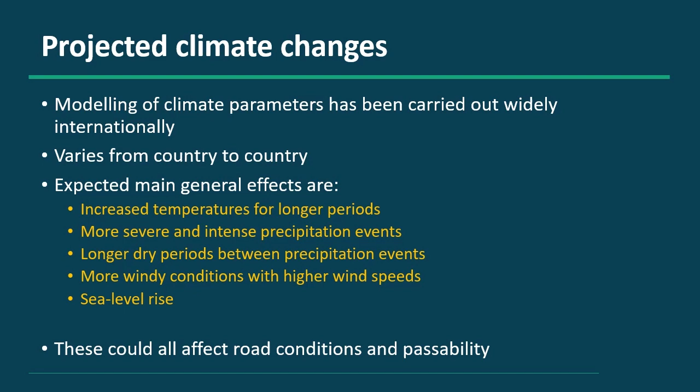What are the climate-related impacts on roads? We'll highlight the potential problems and the impact on the freight industry. The following projected extreme events are of most interest to us here: the more frequent and severe extreme precipitation events and the more prolonged periods of high temperatures and windier conditions. The impacts of the extreme events on roads vary.

Obviously, in the simplest case, we get temporary impassability, excessive wear of the road, and these end up in transport delay costs. We get damage to the road surface, which ends up with higher vehicle operating costs, much slower travel, and more time delays. And then the worst scenario, total collapse of roads or bridges, where we get long delays or use of less desirable alternative routes. And we'll discuss this in a bit more detail shortly.

We can implement adaptation measures. This is done by the road authority before the event, and this will reduce the effects of these problems significantly. But it's costly, and the sort of retrofitting of bridges, for instance, and retro repair of roads is just not going to happen to all the important roads that we'll be looking at.

Okay, if we look at temporary impassability and excessive wear, extreme storm events affect unpaved roads, which are either earth or gravel, but we call them gravel roads generally, far more than paved roads. Obviously, the gravel roads have a natural gravel or earth wearing surface directly exposed to the vehicles and the environment, whereas on paved roads, the pavement structure is protected by either bituminous or concrete surfacing.

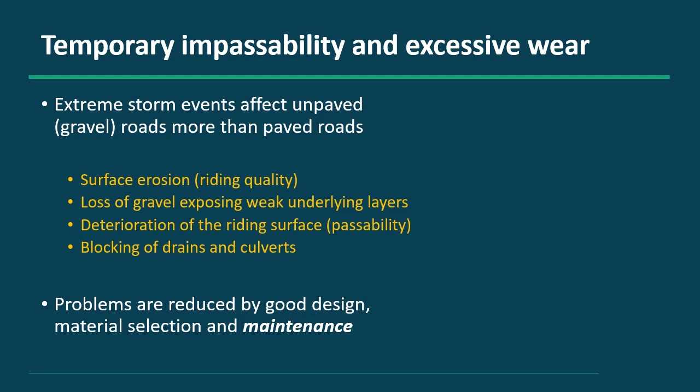We need to get that water away from the road, the pavement structure itself, and lack of maintenance really ends up deteriorating the whole road condition. So problems are generally reduced by good design, good material selection and construction, and then, as you'll hear over and over, good maintenance. If we don't maintain the roads properly, then we have major problems.

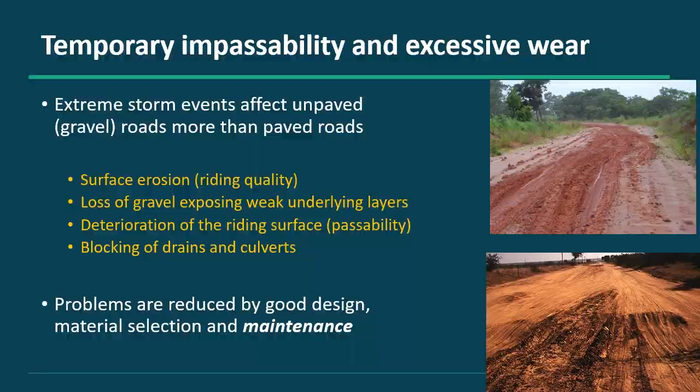Again, just another example of a deteriorated road. The water's ponding there, softening the material, and deep depressions are forming. One can see in the top right photograph, the vehicle's going right up into the edge of the verge, into the vegetation almost, to get around the damaged area. This certainly affects the speed with which you can travel on the road, as well as the condition or roughness of the road.

On the other hand, if you look at the bottom right picture, this is a well-designed, well-constructed, good materials, well-shaped road. This would be resilient to almost any storm. And this is what the ultimate good unpaved road should look like.

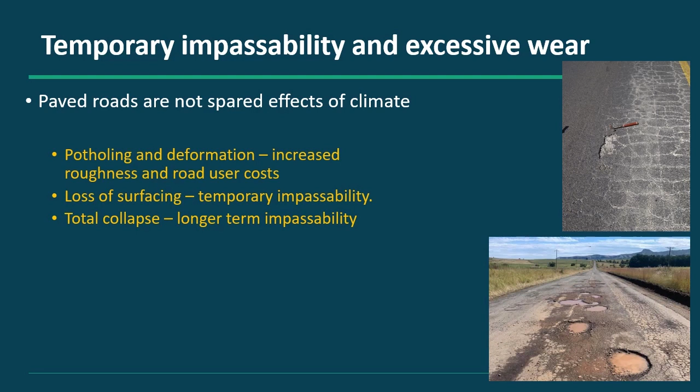So paved roads are not spared from the effects of climate. Potholing, deformation, we see that in paved roads as well, ending up in increased roughness and increased road user costs. Ultimately, the cracking and deformation leads to the loss of surfacing, with potentially temporary impassability or total collapse of the road. Problems can also be reduced by good design, good construction, and good maintenance, but this is a road authority obligation, and there's not much the freight operators can do about this.

We can see again the photographs on the right. Water's got underneath the surfacing, lifted it up, and basically it's just moving away from the road. The even worse situation is shown in the bottom photograph, where water got again into the support structure of the road, and the entire road for many kilometers collapsed, as you can see in this example.

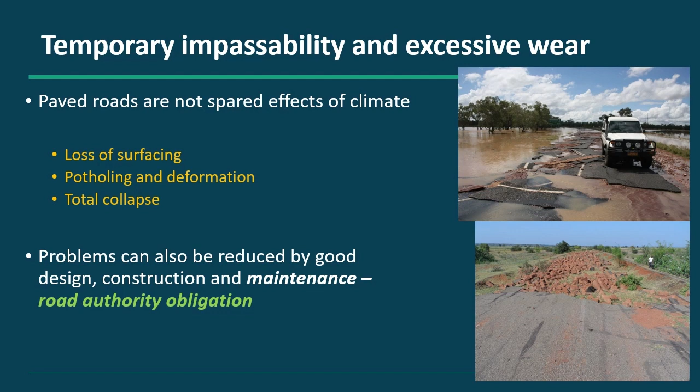So the damage to roads and structures caused by flooding is an important issue that is going to increase in future. It's not always too difficult to repair, maybe 1 or 2 or 3 days to restore passability, but then the road still has to be graded to smooth it out and improve the riding quality. Nothing can be done before the water has receded. So again, there could be delays. The road needs to dry out totally, or the water needs to get away totally, and the road needs to dry out to the extent that one can actually carry out repairs.

The problem with heavy loads on saturated roads is we get premature failure. We get what we call pore water pressures developing in the material under the vehicle tires, and the strength diminishes to almost nothing, and we get shear failures and major distress in these layers. We'll discuss this a little bit later as well.

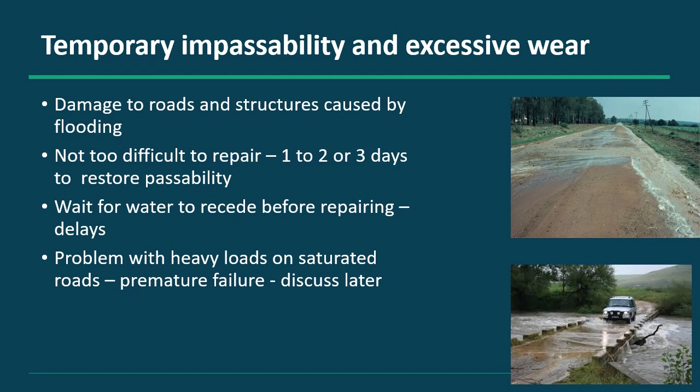Again, a low water crossing, we'll talk about these a little bit later, common in developing areas, which are designed to be flooded, but they can cause major delays. Cars cannot get through usually, and the cars block the road, interfering with passage of heavier vehicles.

Landslides too are also often the cause of road closures. They're usually triggered by high rainfall, and they can close the road from a few hours to many months. You can see the upper picture here, it's a relatively small landslide, covering about half of the road, so it's still passable. The bottom photograph, this is a very large landslide, continuously moving. The road is actually buried under the debris at the bottom of the landslide, and there's an earth road deviation avoiding this landslide. Again, in wet weather, causing major delays.

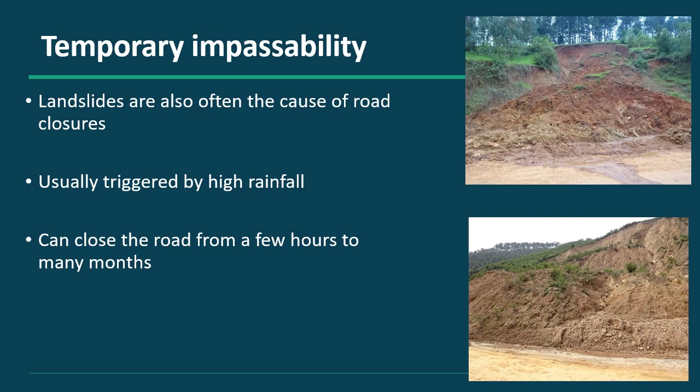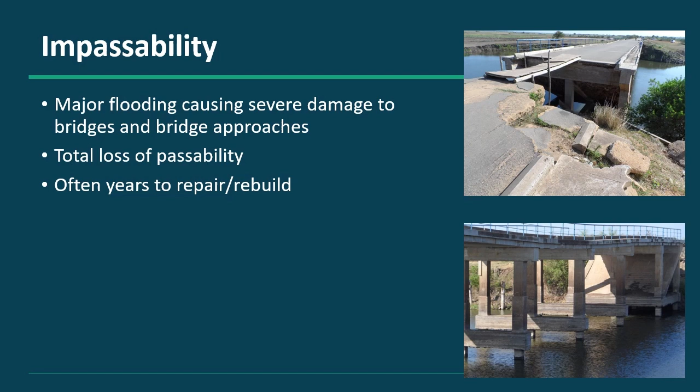This entire bridge had to be demolished and rebuilt solely due to flooding, and the flood waters got up to the bridge deck basically. Often this type of damage can take years to repair or rebuild. In this case, as I said, the entire bridge had to be demolished and rebuilt, and with the contractual and procurement and all the other issues, this took well over 10 years before it was completed.

Okay, we've spoken about precipitation. Now what about high temperatures? We can expect longer periods of hotter weather in future. I think almost every climate model shows that between these severe or more severe extreme precipitation events, there are going to be longer, hotter, drier periods. They're going to affect both unpaved and paved roads.

Unpaved roads, we end up with more dust, more corrugations, the riding quality deteriorates, the safety deteriorates with the dust, the wear and tear on the vehicle components increases, the more dust there is, the driver and passenger comfort deteriorates. So there are a whole lot of extraneous connotations related to these dry periods in developing areas.

Bituminous surfacing and asphalt. Bitumen is what we call a thermoviscoplastic material. So it's hard and brittle when it's cold, and it's soft and ductile or can flow when it's hot. And roads are designed to take these two extremes into account and to operate in the area between the extremes, so they don't deform, but they also don't crack.

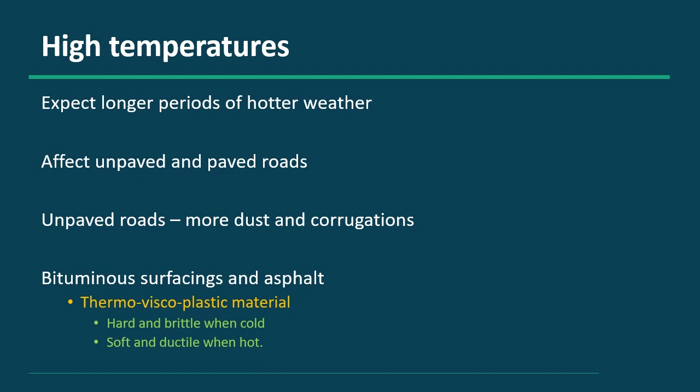It's interesting to see the effects of direct sun and shade. These two photographs are taken just a few meters apart. The photograph on the left shows a pavement structure badly deformed. You can see there's a rut beneath that straight edge of about 30 millimeters. There's cracking, there's movement of material from beneath the surfacing that we call pumping. There's spalling of the cracks, which are slowly developing into potholes.

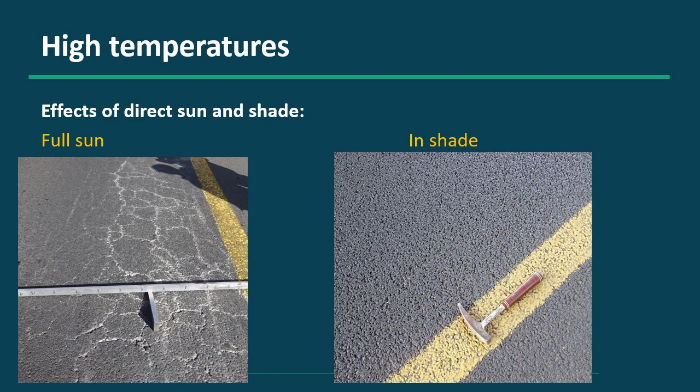Just a few meters away, in the shade of a bridge, that same pavement structure with the same environment, same rainfall and everything else, same traffic, shows absolutely no distress at all. And it's difficult to understand, but if we look at temperatures, we can put things into perspective.

Okay, so let's summarize the effects of climate on roads. The results of climate-related damage are what we're going to have to deal with in the future. The best case scenario is increased vehicle operating costs. In other words, the roads are going to get rougher quicker. The worst case scenario is total road closure.

We have long delays. We may have to use alternative routes while the roads are repaired or rebuilt, bridges are replaced. These aren't always available, in which case it's a significant problem. There's no alternative route. Alternative routes are not always in good condition. They're usually much lower quality, lower standard than the routes normally used. And with the sudden impact of more heavy vehicles on them, they deteriorate much quicker. And often they may be significantly longer as well. So the travel time has increased significantly.

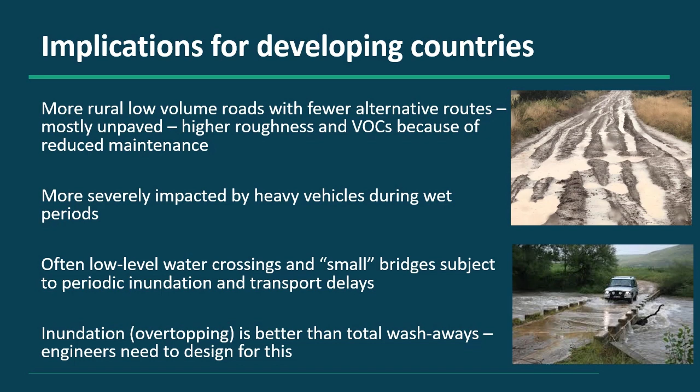Just an example of a bridge designed for inundation. Okay, the marker concrete pillars along the bridge show the depth of the water. In future, obviously, if the water increases significantly in height, these could be underwater. That becomes a challenge because vehicles don't know how deep the water is, again, which causes more delays and has other implications.

Okay, what's the biggest challenge in the developing countries? Funding. Most road construction, maintenance, rehabilitation depends on donor funding or loans. And these tend to be intermittent and unreliable, depending on the economic or financial state of the country at the time. So maintenance with a lack of finance, often a lack of good equipment and often lack of good skills is a major problem. We often get poor construction and poor material operations in these rural areas as well. And they're in remote, challenging topography and often with very poor soil conditions.

So low traffic volumes are normally carried on these roads, but many of these can be overloaded. And there's nothing worse on a low volume road than applying repeated overloads. They are not designed for this. They will fail almost immediately.

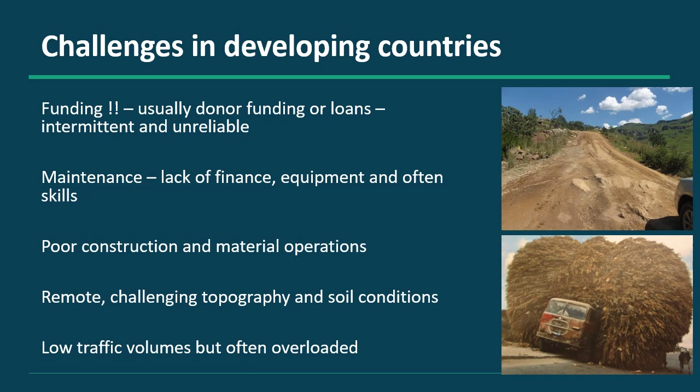This is unlikely due to the cost. To make an existing road more resilient costs quite a lot of money, it takes a lot of time, and a lot of input is required, which is just not available currently in most countries. During upgrading of roads and new construction or reconstruction, it's important that road authorities build climate resilience into these pavement designs. And I think there's enough knowledge and experience around now for this to actually happen.

So how can the freight industry help? Possibly with lobby groups, political pressure, direct funding, different designs, things like air suspensions perhaps, or sticking to dual wheels instead of single wheels, this type of thing. Also, don't overload vehicles. Apart from the damage to the vehicle, there's much more significant damage to the road. Don't use excessive tire pressures. They increase the contact pressure on the road, which creates more damage.

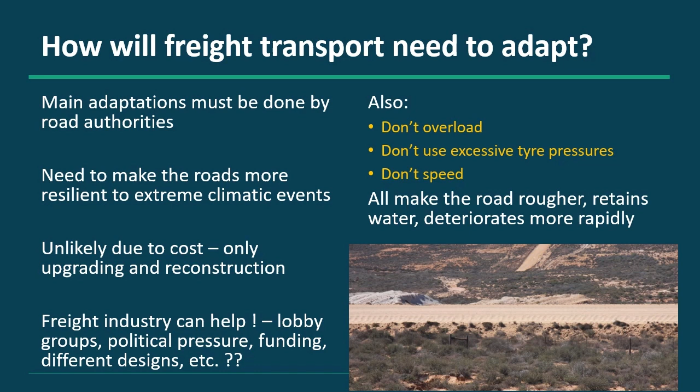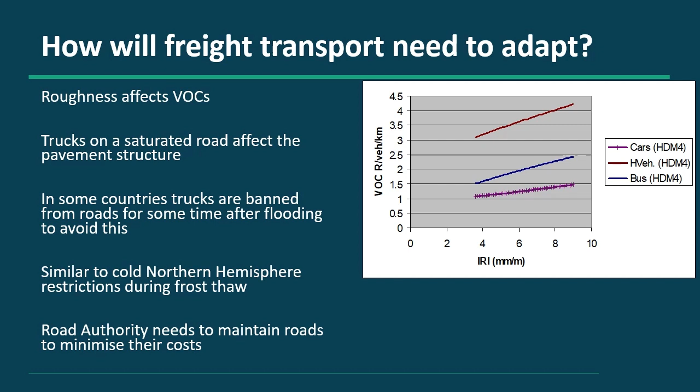Trucks on a saturated road affect the pavement structure, as I said before, through the pore water pressures. In some countries, trucks are banned from roads for some time after flooding to avoid this. It's similar to the cold northern hemisphere restrictions during the frost thaw period when trucks are not allowed on certain roads. But the road authority needs to maintain the roads to minimize their costs. And this is shown in the next slide.

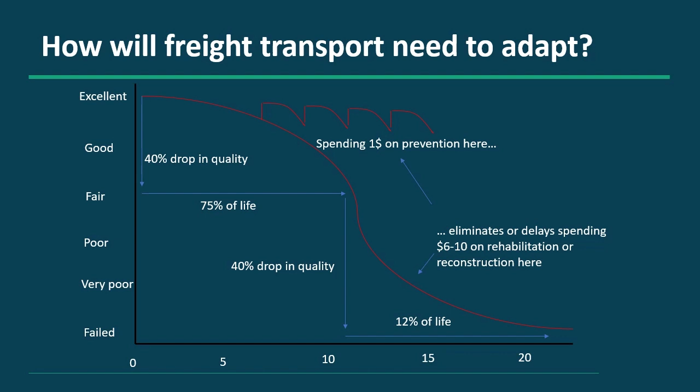I'm not going to go in great detail here, but the main red line here shows a typical deterioration of a road over its design life if there's no maintenance. If you look at the little scallops of red lines, if you maintain the road, it improves the riding quality, deteriorates again, maintain it, deteriorates again; this is what normally should be done. If we don't, we can see what happens down here. So if we spend $1 here on maintenance in this upper region, we save between $6 and $10 down here, 13, 14 years later. So the maintenance is critical in saving money.

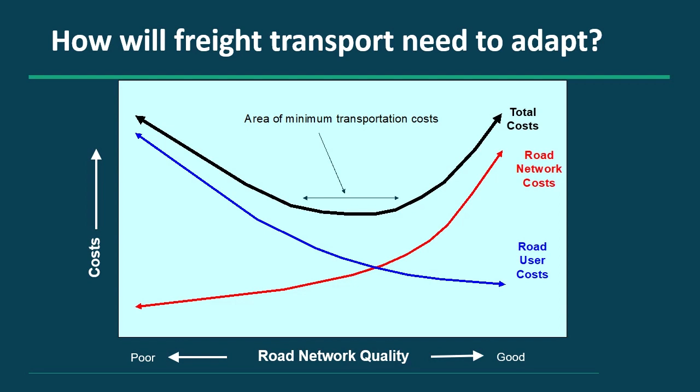And again, if we look at the relationship between the road user costs, which is your freight transport cost basically, and the road network cost, which is the road agency, the red line, if we add those two lines together, we get a low point in the middle, the area of minimum transportation costs. And in terms of road quality, that's where we should be sitting. It's no good spending a lot of money on a very expensive road. We can see the road network costs increase significantly, but we don't want to spend little money and have the high road user costs. We need to be in this optimum area, and this is a function of the road authorities' duties.

Okay, to conclude, the freight transport industry depends on road authorities to provide an acceptable route, a statutory obligation in most countries. Climate change is going to make their lives more difficult. Road authorities in most developing countries can hardly maintain, let alone improve roads. Reliance will therefore be on the road freight industry to adapt as much as possible, possibly changing operation characteristics where possible, and start adapting vehicles. Things like suspensions, dust proofing, wading depths, things like this. Interesting challenges ahead for both the road authorities and freight industry.